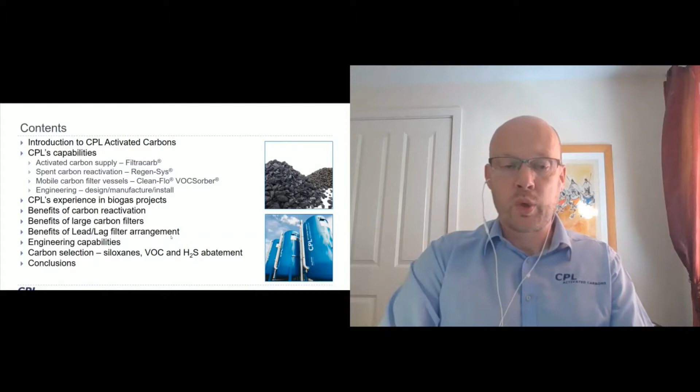2018 was a big year for us in terms of expansion. We've more than trebled our capacity to recycle spent carbon, what we call amber waste carbon. So that is industrial processes like biogas, odor control, and on the liquid side, wastewater and remediation, that type of thing. That year, we also acquired a company that manufactures our mobile filters. They're called CPL Icon, and they're based in Chesterfield here in the UK. I'll talk more about filters later.

We're quite a small team, but we're very experienced. Last time I counted, between us we have more than 175 years in the carbon industry. So we like to think we're the experts in carbon filtration. You probably know carbon is used in many purification applications, from drinking water through to gold recovery and everything in between. But certainly here in the UK, we are market leaders in a number of sectors like biogas, flue gas at energy from waste incinerators, remediation projects, and overseas we're very big in edible oil, particularly olive oil and other edible oils that need purification.

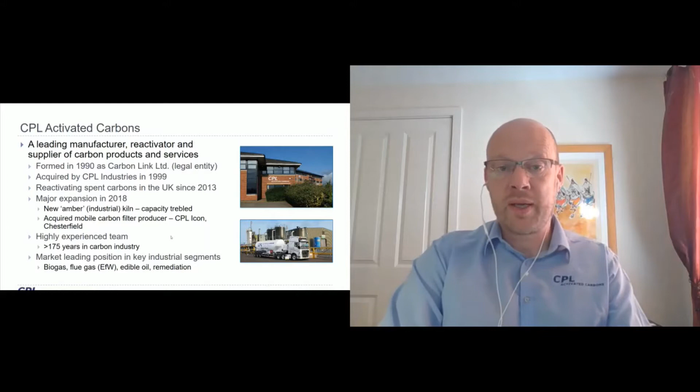So a bit about our facilities and capabilities. Our main manufacturing site is in Immingham, which is on the east coast of England, here in the UK. We have two separate carbon reactivation facilities. The big one is amber waste. This is for industrial spent material, including biogas carbons. We have a capacity of 8,000 tonnes per year of that, so that is a big unit. And we have a separate unit for carbons from drinking water and food grade applications. It's a smaller unit, but it's completely separate.

As you can imagine, it's very important to keep those two streams separate. And it's a large site, and as the business grows, we have plenty of space to grow with it.

We also manufacture a number of our own activated carbons. There's the impregnated grades for removal of things like hydrogen sulfide and ammonia. And I'll talk a bit more about what impregnation is and what the different types are later. But we do produce some of our products ourselves here in the UK.

We have a strong engineering capability in terms of carbon vessel design and fabrication, plus ancillary pipework, as I mentioned before. And we have multiple warehouses and transfer stations, both here in the UK and in France. And we can also supply our carbon and vessels into Spain as well, if required.

Not so relevant for biogas, but we produce powder activated carbon, PAC, which is typically used for flue gas treatment in energy from waste facilities and in edible oil. And we have multiple grinding facilities here in the UK to support that business as well.

We originally registered in the UK, but because of Brexit, we have a subsidiary in Spain, in Madrid. So we think we're pretty much Brexit proof in terms of supplying carbons to our European mainland customers. And of course, as you would imagine, we have the latest quality and environmental accreditations.

So a bit about the biogas sector. We have many customers in the biogas industry from the various subsectors, for example, landfill operators, wastewater utilities, traditional agricultural AD sites, food waste sites. And we also supply a number of service providers who do more of a complete package into the biogas sector. It could be involving engine maintenance or other services.

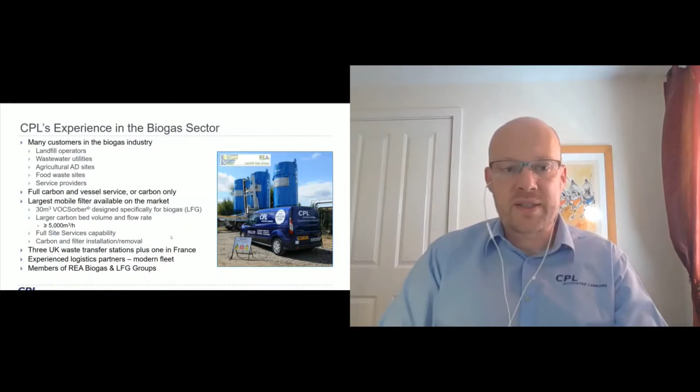And this can be important, especially in landfill gas, as the volumes decline and the impurity mix might change. It's important to have good protection for your engines. And you don't want to invest in new engines as the life cycle of a landfill declines.

Carbon filters can cope with varying gas qualities and quantities, so we can adjust the carbon type and quantity to suit the conditions of each customer site. And you can increase or decrease the number of filters to suit changing conditions too, so it's very flexible.

In addition to biogas purification, of course, another classical application for carbon is general odour management. We all want to be good neighbours, and increasingly, there are buildings coming up close to biogas sites and landfill sites. So it's important to remove odours wherever possible.

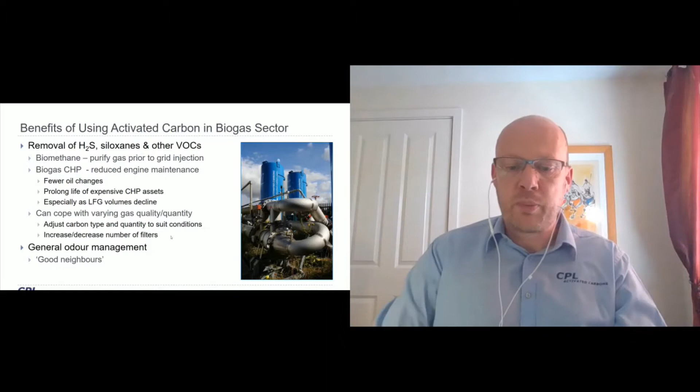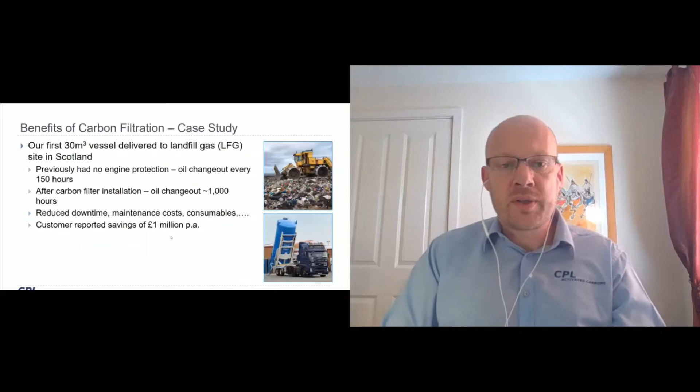So one case study at this stage, again, I showed this yesterday, so I apologise if you've seen this already. When we launched this large filter, this 30 cubic meter VOCSorber, the very first unit went up to a landfill site in Scotland. And previously they had no engine protection at all at that site, and they were changing the oil on the engine every 150 hours. So you can imagine the expense and the hassle that was causing.

After they installed our filter, the oil change out increased to every 1,000 hours, which meant reduced downtime, maintenance costs, and consumables. And the customer reported a saving at that site of over about £1 million per annum, so a very significant saving at one site only. So we work extensively with the UK landfill biogas sector now, supplying these types of vessels.

As I said, wherever possible, we recycle carbon at our site at Immingham in North East Lincolnshire. We have a capacity of around 8,000 tonnes per annum following our expansion in 2018. By a factor of 3 times, that's one of the biggest industrial kilns in the UK, and it's actually one of the biggest amber waste kilns in the whole of Europe. So we did invest heavily in a very big kiln with a view of expanding the business going forward.

The technology, if you're interested, it's called an indirect rotary kiln. You can just see it on the top right-hand side. It's basically a horizontal kiln. The spent carbon is on the inside, and the heat is applied to the outside of that metal tube. And it's a very efficient, flexible technology, more so than some other technologies like a brick-lined kiln. It has lower energy requirements, and it's got a very quick startup and shut down. So we think it's a much more flexible system.

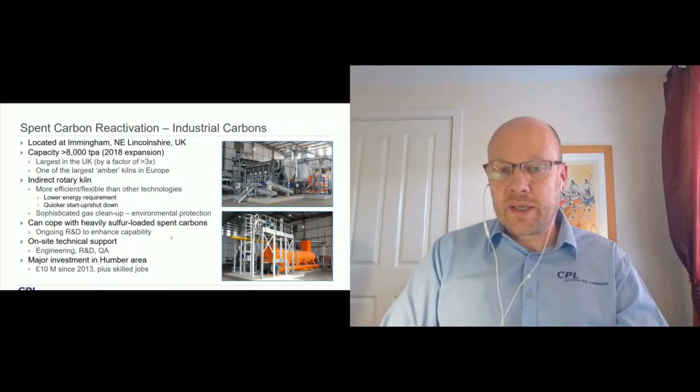Being amber waste, of course, it does generate emissions, so we have a very sophisticated scrubber system to ensure environmental protection, and again, being good neighbours. And the big orange beast at the bottom isn't a submarine, it's actually our thermal oxidizer, which is next to the reactivation kiln. Our kiln can cope with heavily sulfur-loaded spent carbons, which is a particular issue in the biogas sector, and we always have ongoing research and development to try and enhance that capability. We know that is a particular problem in your industry.

It's a big industrial site. We have on-site technical support in terms of engineering, R&D, and QA. So it facilitates quick maintenance and solving problems as and when they arise. And as you can imagine, that was a big investment. We've invested over £10 million sterling since 2013 in the 2 kilns, plus a number of skilled jobs. So we're very proud of our capability and the growth we've had.

So why bother? Why would you want to reactivate your spent carbon? Well, firstly, performance. It does maintain excellent VOC performance, and that's especially true for cyclic siloxanes. And if you're not sure what those are, I'll show you those a little bit later. But for biogas applications, a regenerated carbon is very good. Carbon footprint, we've calculated that certainly with our technology, the carbon footprint reduction of using a recycled carbon versus a virgin carbon is more than 90%. So that's very important in terms of your environmental message.

Of course, once the carbon is in Europe or certainly in the UK, it stays here. So you're reducing the importation and reducing product tourism. And with a central location on the east coast of England, it's very good for many of our UK-based customers.

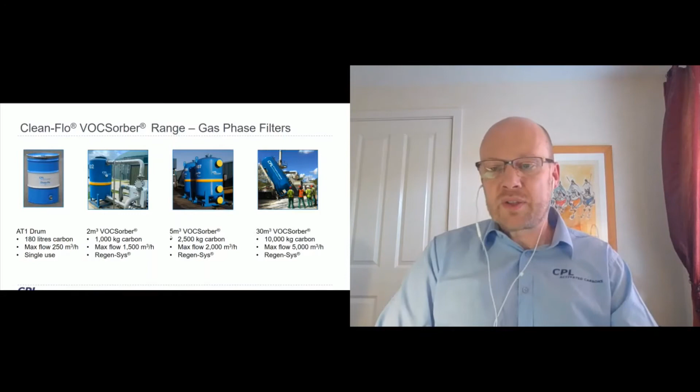On the right is our big vessel, the 30 cube VOCSorber. That's at a landfill gas site in southern France, with flow rates up to 5,000 cubic metres an hour. It's a big step up, but for larger sites that's required, and it's also used at biomethane sites as well.

I mentioned briefly our high flow range. This is typically for waste transfer stations where you need to change the entire volume of air inside a building. There are various sizes. These use different technology - they aren't deep bed, they're either annular beds or other technology inside them. This ensures good contact with the carbon without the huge pressure drop you'd get with a traditional deep bed vessel.

Our current flagship is at the bottom there, the HF24. It's based on a 30-foot container, 10 metres, and contains 24 cubic metres of carbon, taking gas flow up to 45,000 cubic metres an hour. It does take a lot of space, 30 foot, but we're developing a vertical version as well at the moment, which we'll be launching very soon.

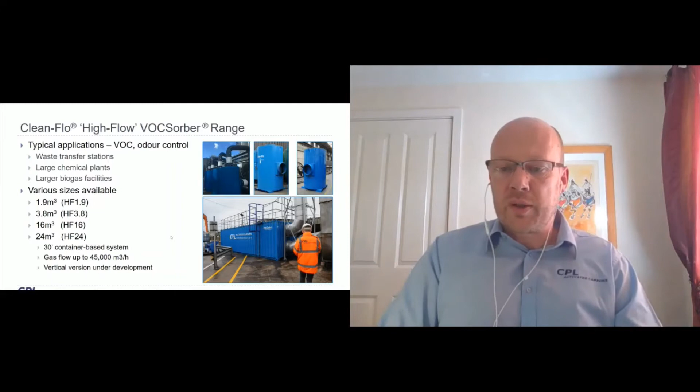So what's the benefit of using these mobile carbon filters on a rental basis? As I mentioned, it avoids capital expenditure for the end user. The vessels are generally rented, there's no on-site carbon handling, it's simply a plug-and-play concept. They turn up full of carbon, attach it to existing pipework, and when it's spent, it gets changed out. It's a modular system offering a flexible solution.

As I mentioned before, you can add and remove filters as required. If there's a spike in contamination, you might want a second filter, or if it's a landfill gas site and the volume of gas goes down as the site gets older, you can perhaps remove a second or third filter. And if you have multiple filters, you can have them set up in different ways - in parallel, particularly if you've got a very high gas flow, or in series, which is what we call a lead and lag arrangement.

The front vessel takes the punishment, does the heavy lifting, and the second vessel acts as a polishing filter. This means you can work that lead filter through to exhaustion, and when you come to change it, if it's properly connected through pipework, you have no downtime - you simply swap them around. The second filter becomes the first filter, and you change out the first filter. So it's very flexible, and that's a system we recommend for many customers.

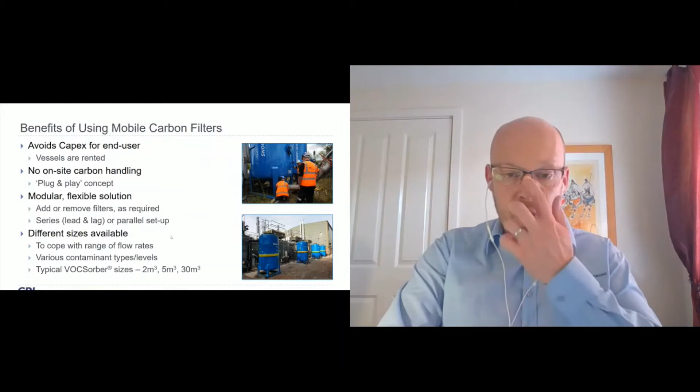Different sizes are available to cope with different flow rates and various contaminant levels and types. As shown on the previous slides, you can see the different sizes: 2 metre cube, 5 cube, 30 cube. That bottom picture is a landfill gas site here in the UK that previously had 6 2-cubic-metre VOCSorbers, one for each of their engines. But now they've changed those out and have 2 of our larger 30 cube vessels, which has given them quite a big saving and process improvement as well.

So a bit more about the big beast, the 30 cuber. Being a large filter, it gives you more usable bed volume. So the gas simply has more carbon to get through, meaning you've got more chance of removing contaminants. And that's particularly true with impregnated carbons, taking out things like H2S.

It's delivered, as you can see in that picture at the top, by a dedicated tipping trailer. The partners we use for logistics are really skilled. They can deliver these things on a sixpence, very accurate, and take very great care of customer sites.

Flow rate on them is up to 5,000 cubes an hour. It doesn't have to be that high, but that's the top end of what you're looking at. So for big sites, that's a very useful feature, and I think it's bigger than most of our competitors' range as well.

We designed it specifically for the biogas sector. We saw a need in the market for these types of units, and that's certainly proved very successful in the last few years. There are many benefits of using these big filters compared to a smaller filter.

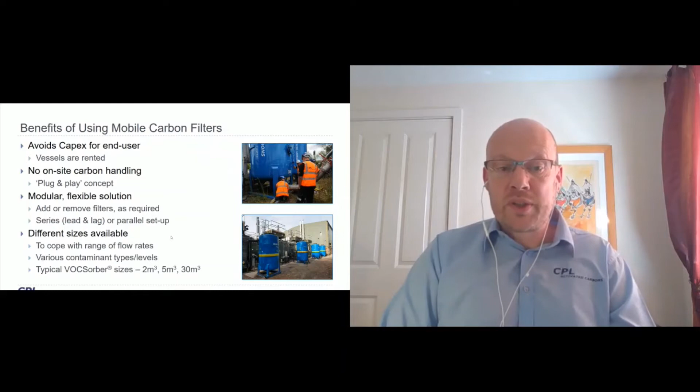Obviously, you have fewer carbon filter changes, which is great for your process and your cost base, and there's less road mileage and carbon footprint. We did a comparison for one customer comparing the 30 cube with our next small vessel down, the 5 cuber, and there's approximately a 50% CO2 saving by using the big filter with fewer exchanges.

It's a flexible unit. It can cope with various gas flow changes, and you can even mix carbons within one vessel if you want to. So you can have a layer for hydrogen sulfide and a layer for your VOCs and your siloxanes. It gives you a lot of flexibility.

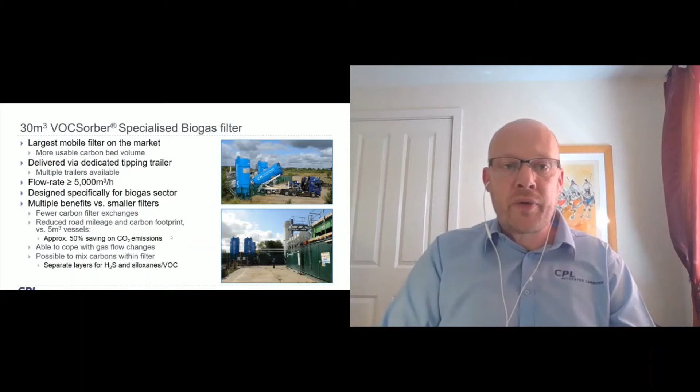As I mentioned, if you have more than one filter, you can have it in what we call a lead and lag arrangement. So the gas goes into one filter, comes out of that filter into a second filter. We do suggest this arrangement for many customers, especially with a higher flow or if they have particularly heavily contaminated biogas. It gives you optimized contact time between the gas and the carbon, improves your bed kinetics, and ensures maximum removal efficiency.

And as I said, if you pipe it properly, then you get total protection at all times. You do not have to switch off your engines. You simply direct the gas through the second filter to change the first one, and then you replace it, and vice versa.

The second vessel is basically a polishing filter, but it allows the first vessel to run through to exhaustion. So you can basically get the maximum bed potential out of your carbon filters. It reduces the number of changes and reduces the cost significantly.

So we always suggest, especially if we're involved in the pipework installation, to allow for multiple filters. Even if a site only requires a single carbon filter initially, if they're unsure about it going forwards, making the pipework available for multiple filters saves a lot of time and effort and cost going forward. We look at site by site, working with our customers to look at their particular conditions and get an optimized solution for them.

I mentioned Regen-Sys, so this is our overall carbon vessel recycling service. This is the schematic we use to represent this. Starting in the middle, one of our vessel service centres - these centres take an empty vessel and fill it with normally recycled reactivated carbon.

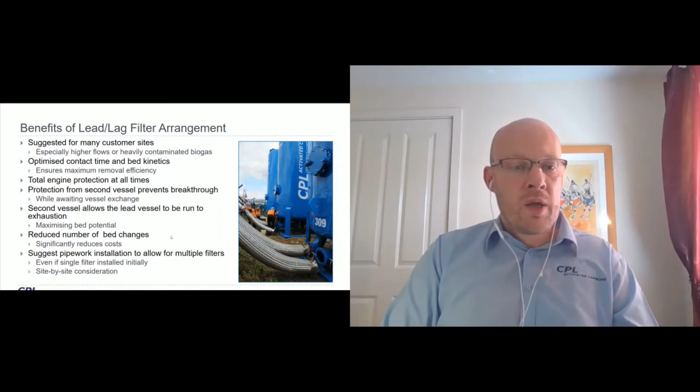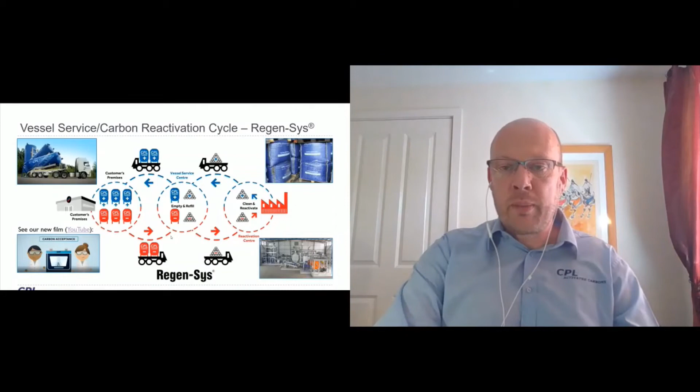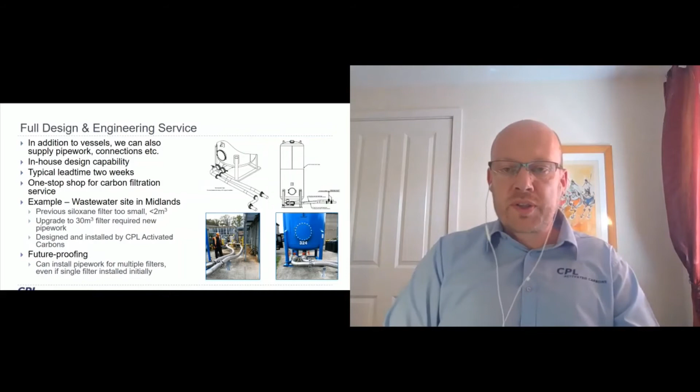It's obviously different technologies for making biomethane - it could be a membrane system, water wash, or other things. For membrane systems, not this one, the carbon filters tend to be up front to take out the H2S and protect the membrane. But in water wash, in this particular case, we installed 4 high-pressure carbon filters to polish the biomethane after the water scrub. So it's basically a final step before injecting into the grid.

And we did all the interconnecting pipework, which you can hopefully see at the bottom of the picture there. Also, this large unit on the left is a fixed, large odor control unit for the off gases as well. So yeah, we had very big involvement in this project - 4 carbon filters, all the pipework, and an odor control filter. We're very proud to be involved in that project. That was only just last July, just over a year ago.

So that's a bit of overall about our products and services. I want to talk in more detail, if you'll allow me, about actual product selection - which carbon, what is carbon, and how do you select the right one for the job?

So what is activated carbon? It's a very pure form of charcoal with a very high surface area. When I say high surface area, we're talking about a teaspoon of carbon having a surface area of about a football pitch. So it is quite amazingly extensive surface area.

It's made out of various carbonaceous raw materials, principally coal, coconut shell, and wood. We're always looking at other biomass raw materials as well. Each of those raw materials gives a carbon with different properties. So it's important to work with carbon suppliers to choose the right one for your application.

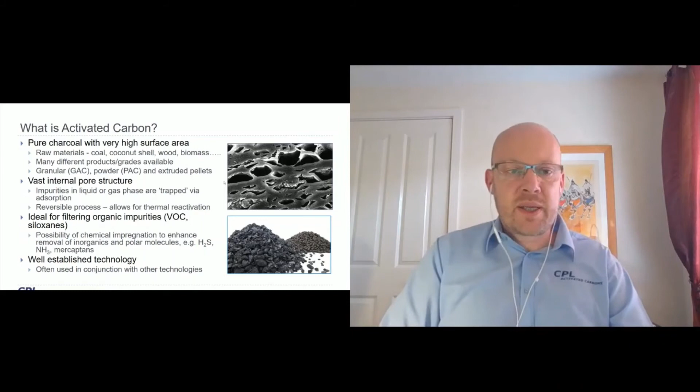Moving over to inorganics, the most common is always hydrogen sulfide, formed by any decomposing organic matter. Others might be ammonia, for example, if you're using chicken litter or whatever, but H2S, hydrogen sulfide, is a particular problem. It's corrosive to the engine, it can form sulfuric acid, but it's also odorous and toxic. So you'd want to remove it to as great an extent as possible.

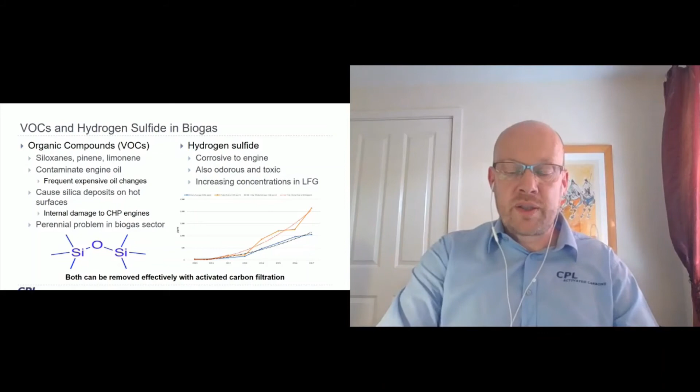Traditionally, landfill gas, which is a big sector for us, siloxanes are the main problem, but we are aware that going forward, hydrogen sulfide is becoming more of a problem in some landfills as they get older and the waste gets more concentrated. But both of these types of products can be effectively removed with activated carbon filtration. That's the message today.

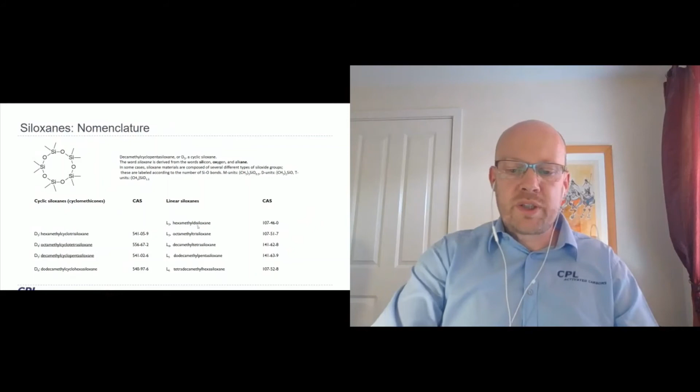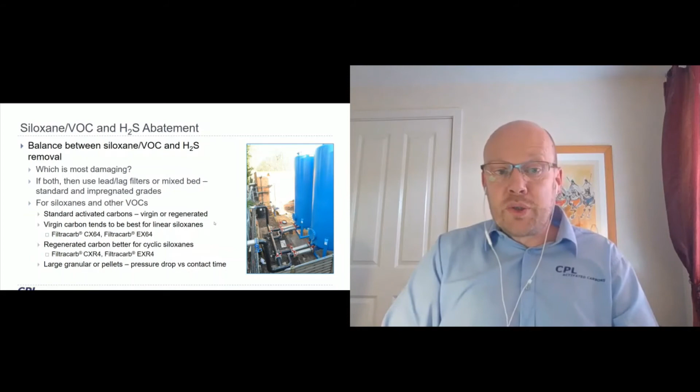When it comes to solving a problem with carbon filters, often you have to balance siloxane or VOC removal with H2S removal. So you have to ask which is causing you more damage - where is your pain point with your process? If you've got both, you might choose to use a lead and lag setup with two filters, or even a mixed bed using standard and impregnated grades. We will work with our customers to choose the best solution for whatever problem you have on site.

For siloxanes and other standard VOCs, we offer normal non-impregnated carbon, either virgin grades or regenerated. As I say, we try to promote regenerated wherever possible. Virgin grades are very good for linear siloxanes, where they have a different pore structure that suits the linears better. Our grades for those include CX64, a granular grade, and EX64, our 4mm pellet.

Regenerated carbons are very good for cyclic siloxanes. It's a more open pore structure, which suits the larger cyclic molecule. The grades we offer for those are CXR4 - the R stands for regen, that's the large granular - and EXR4, our large regenerated pellet. With large granular or pellets, you've got to think about pressure drop and contact time. All these factors we will discuss with you on a case-by-case basis.

On the right-hand side is a fairly recent landfill gas site. In fact, that was the site I mentioned before where they had six small filters. Now they've got two large filters, and we did all the pipe work there as well. We've arranged that, as you can probably tell, as a lead and lag arrangement, or parallel, whichever they need. But basically, it ensures they can redirect the gas and not have any shutdown of the engines. That's set up.

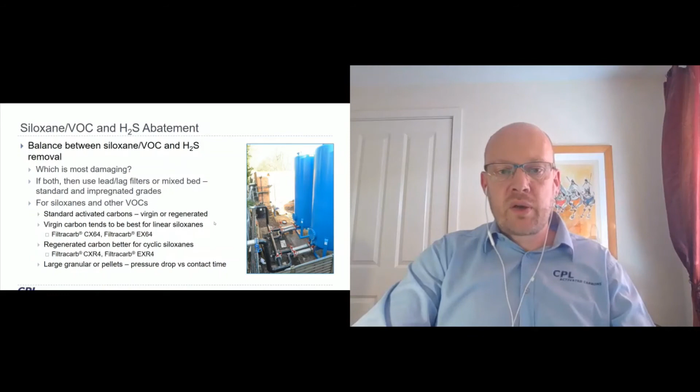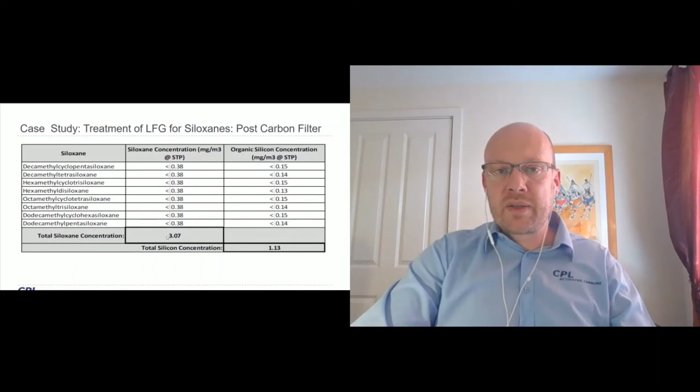I'll just flick down to the gas quality after the filter. Took it out completely, so the total siloxane went down from 264 to 3. So no problem at all for an engine to handle that. That was a successful application, and that's typical of taking out siloxane from biogas streams.

Whoops, sorry, I'm just going a bit twitchy on the number there.

Moving on to inorganics, hydrogen sulfide and other inorganics. These require impregnated carbons, where you're promoting a chemical reaction on the surface, called chemisorption, rather than pure adsorption. It usually requires more contact time between the gas and the carbon, which is a benefit of having a very deep bed filter.

The selection of products, and there are many available, depends on process conditions, particularly oxygen levels, which I'll go into in a bit. It gets quite complicated, but process conditions have a big impact on your selection, as well as the impurity you're targeting. Humidity and temperature affect it too. It's a chemical reaction, so it's affected by temperature, and humidity does impact carbon performance. If you get humidity trapped in the pores, that will reduce the usefulness of the carbon pores itself.

So listed here are some of our main impregnated grades used for gas phase applications, including biogas, plus also more generally odor control, because the impurities are the same ones. The thing to look at really here is the oxygen level. If you have more than 2% oxygen, plenty of oxygen, we suggest a potassium carbonate impregnated carbon to take out sulfur-based impurities like H2S and mercaptans. That grade is called SA78.

Going to slightly lower levels of oxygen, we use a copper oxide impregnated carbon, our SA70, and I know many customers in the biogas sector use that grade. Lower levels of oxygen still, we offer a potassium iodide impregnated carbon, again for sulfur-based contaminants, and our product for that is SA63. For very low levels of oxygen, we can offer a caustic impreg, our SA62. These look like relatively small changes, but they involve completely different product selection, and we work with our customers to choose the best solution.

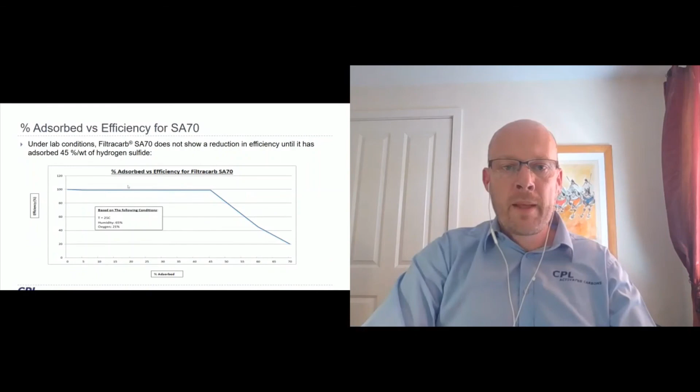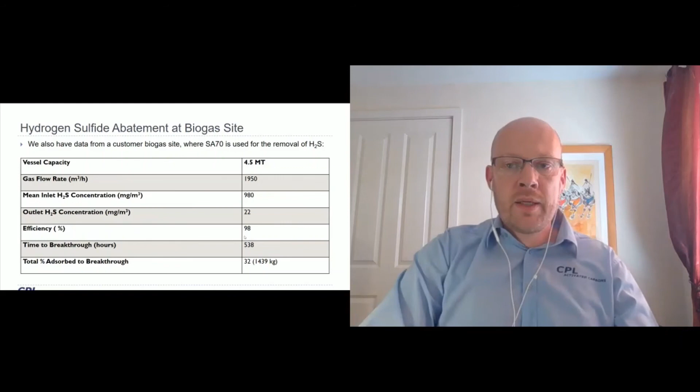That's a quick run through of our products and services and our other grades of carbon, and what you might want to consider when selecting one.

To conclude, we are a leading supplier of carbons and services into the biogas sector. We can supply carbon anywhere, but here in the UK, we're the only UK-based supplier to offer all of these services: local production of impregnated carbons, reactivation of spent material from industrial processes, in-house production of carbon filters, full engineering capability backed up by a nationwide site service, also backed up by technical R&D, QA lab support if required, and quality accreditation. We're keen and ready to work with all biogas operators out there to protect your assets and improve your plant efficiency in a safe, cost-effective and environmentally responsible manner.